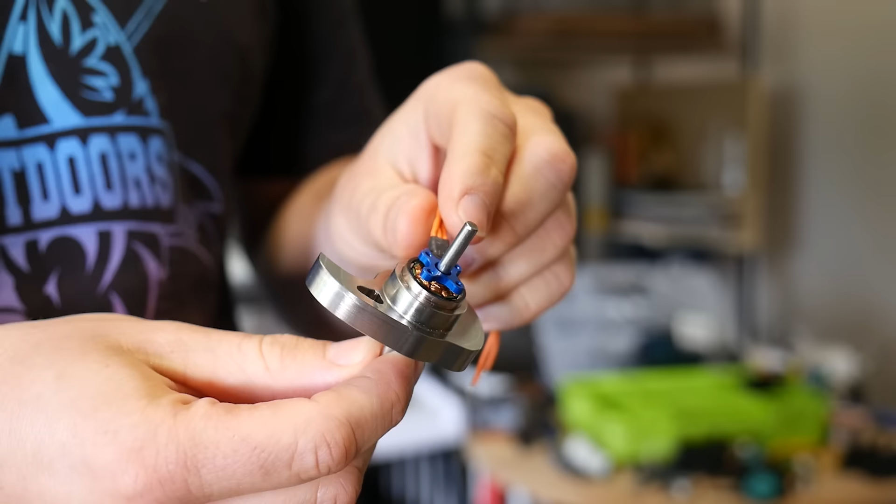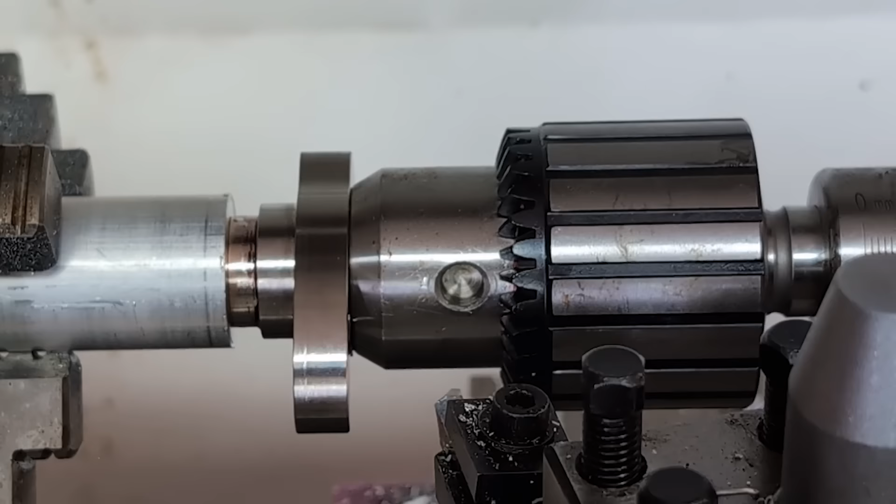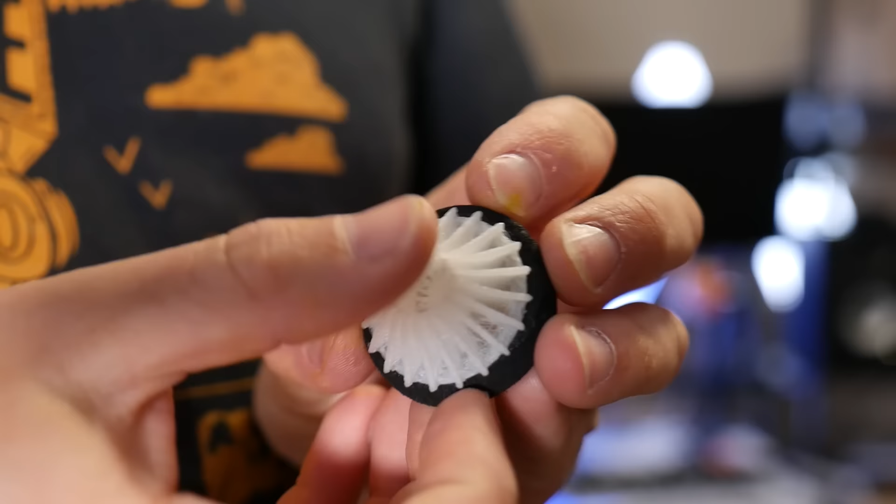This is a combat robot weapon blade with integrated motor made from solid titanium, and it's designed to never stop spinning. In the previous video, I went over the design and manufacturing involved to bring it to life, but now it needs to go into a combat robot to put that theory to the test. So in this video, I'm going to show you how I used advanced 3D printing materials and unusual design choices to make this. My name is Angus, this is Maker's Muse, and this is Dead Cat Bounce. Let's get started.

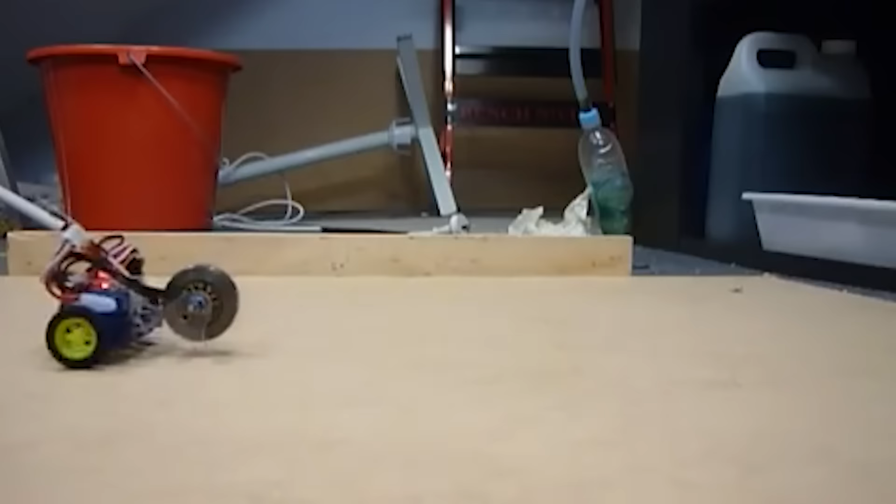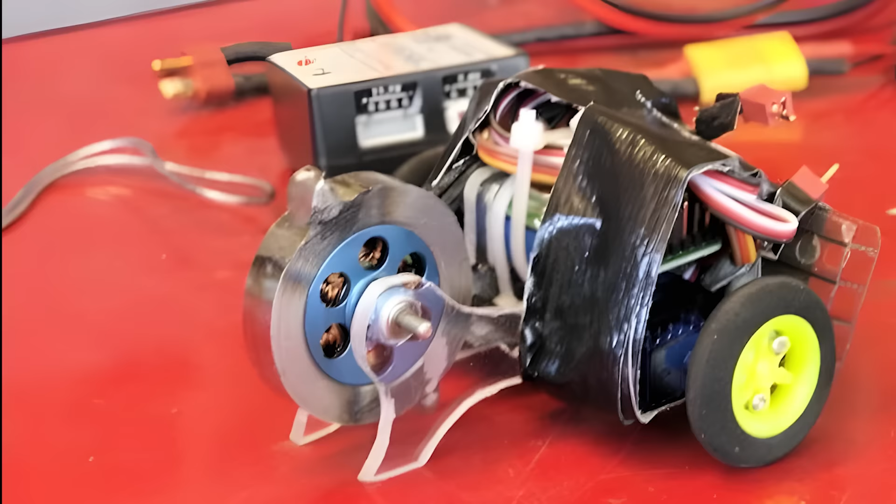In the previous video, I talked about Nyant. This little vertical spinner was a ton of fun to compete with all those years ago, and it dished out its fair share of damage, but it had literally no armor, and with how competitive the Antweight class has become here in Australia, that's just not going to cut it anymore.

This hub motor is the start of a whole new vertical spinner design, which I hope is as durable as it is destructive. But now comes the hard part. I need to design the rest of the robot around it to be just as tough, and we need to fit it all within the tiny 150 gram weight limit.

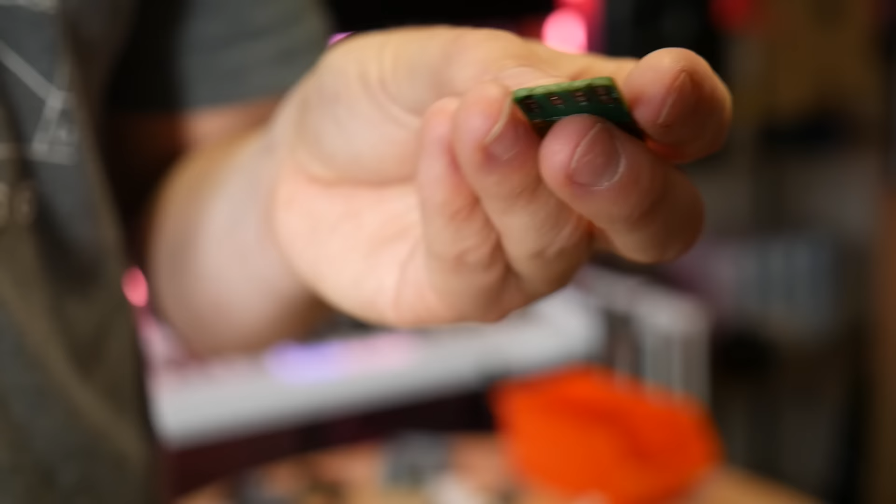For drives, I'm going to go with these N10 gear motors from Wranglebox. These motors are a premium option for Antweights, but they actually weigh less than the previous motors I used while having more power, and they're more compact, plus they have a steel faceplate, which should be much more resilient to impact. To control them as well as the weapon, once again I'm using a Malenki Nano. This combines the roles of several motor controllers as well as the receiver all in one compact board, which is super handy at this scale because it cuts down on a heap of wiring.

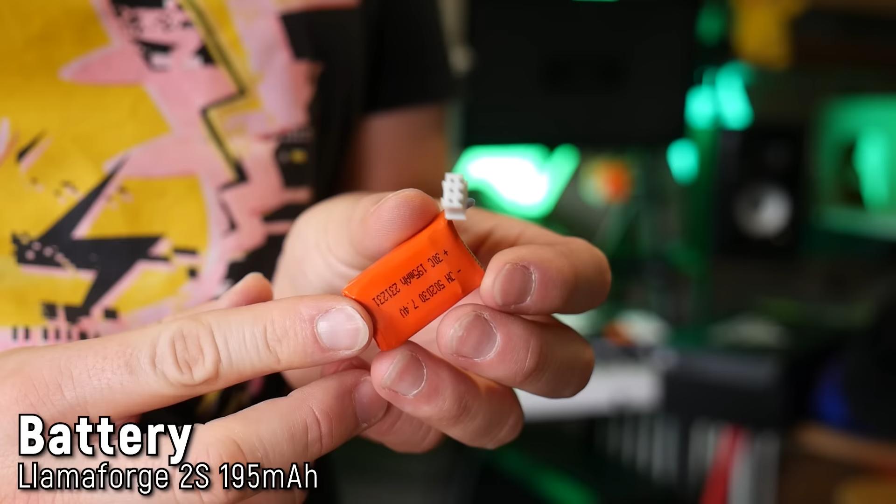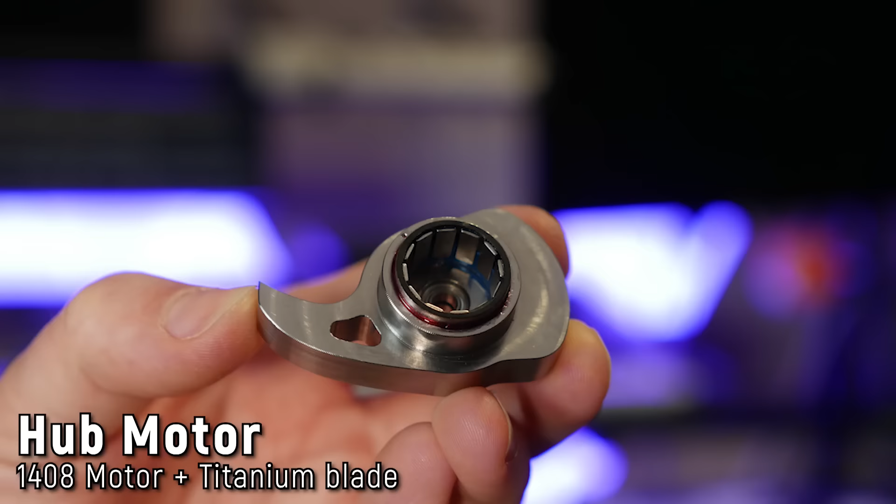The battery is this 2-cell 195 mAh pack from Llamaforge here in Australia, and the weapon system, well, you've seen it already. This massive hub motor is made out of a 1408 size brushless outrunner that's been carved up and inserted into a solid titanium blade, and it's controlled with a cheap 40 amp brushless speed controller running AM32 firmware. I actually don't know what these speed controllers are called, but they seem to work great, and we've just started calling them the No Fish ESCs because of this little icon on them.

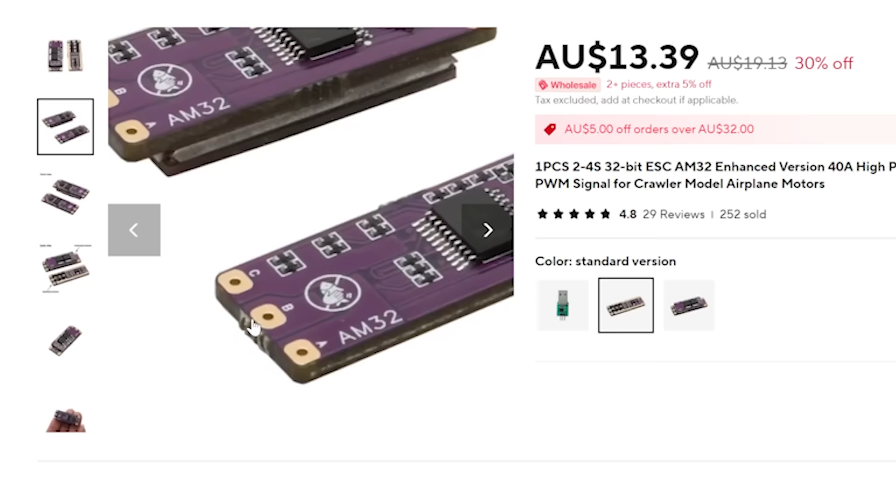So it's time to fire up CAD and get to work. No, just kidding, you know the rules, it's pen and paper time. Always sketch out your ideas before launching into CAD because you can box yourself in to your knowledge of the software instead of exploring really creative ideas with pen and paper. And the best way to design Antweight robots by far, in my opinion, is to just lay out the parts on some grid paper and smash out some concepts.

We've already got this big vertical chunky disc, so I just traced it and then figured out how to fit everything around it in a nice compact package.

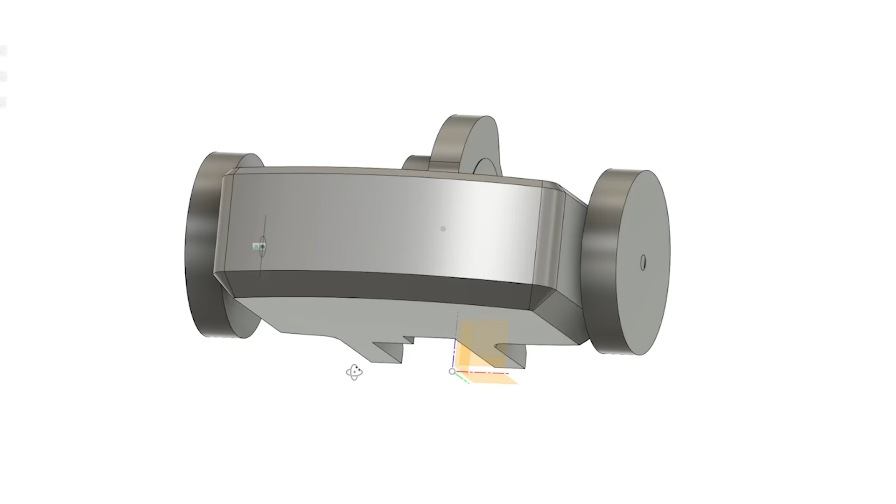With a notebook sketch serving as my template, we can now finally fire up CAD, and this was my first pass. The huge blade in such a tiny frame looks pretty ridiculous, and I don't doubt it'll dish out the damage, but those wheels indeed do look pretty vulnerable. It wouldn't take much for another spinner to clip them at the front or rear and just tear them right off. The rear cavity does seem to have plenty of space for all the electronics, but again, it's also very vulnerable if my opponent gets a lucky hit to the back.

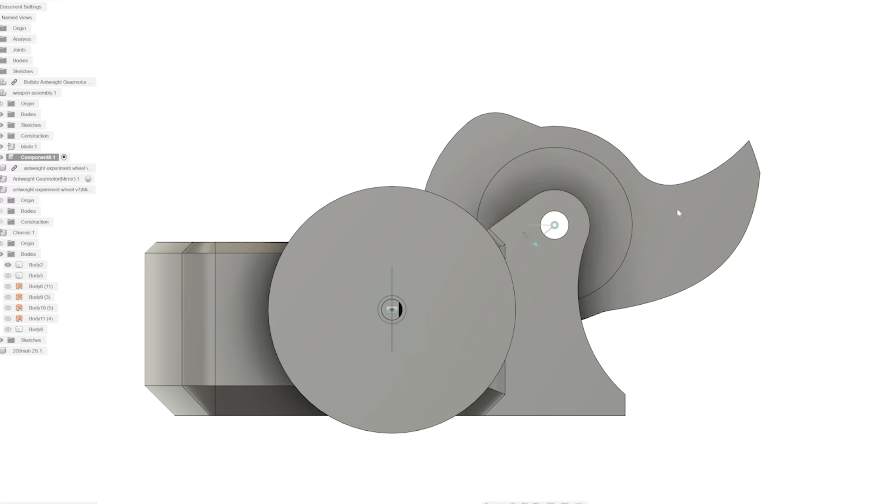Also, the blade actually extends down past the frame. This is intentional because the wheels will give the robot some clearance, but I'll definitely need some sort of skid to stop it from smashing on the floor as it drives around. Thankfully though, because it's so tiny, the frame weighs less than 20 grams so far, so there's definitely weight to spare for a bit of offensive design and a lot of defensive design.

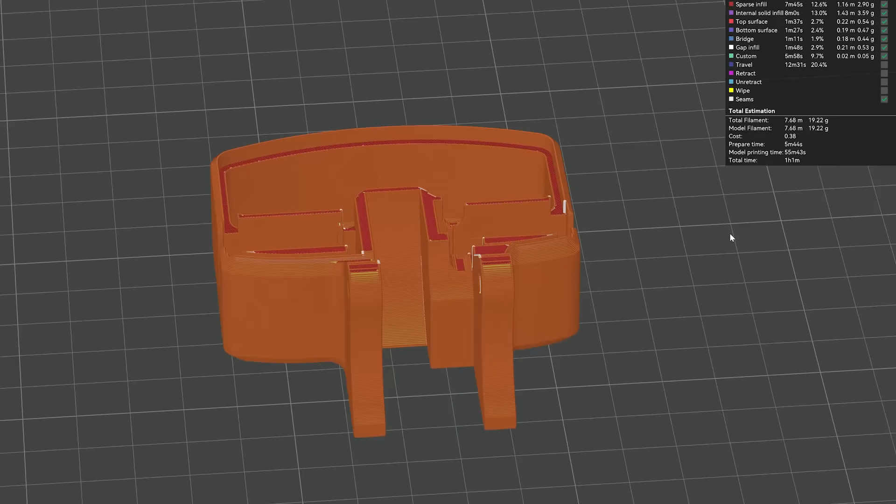And I've got this absolutely wacky idea I've wanted to try for some time. A long time ago, I had a beetleweight robot called Fugu, and it was covered with these metal spikes made from bicycle spokes. The idea was that these spikes would soak spinner hits before they even got to the chassis, absorbing the energy and deflecting, or at worst, ripping them off like ablative armor.

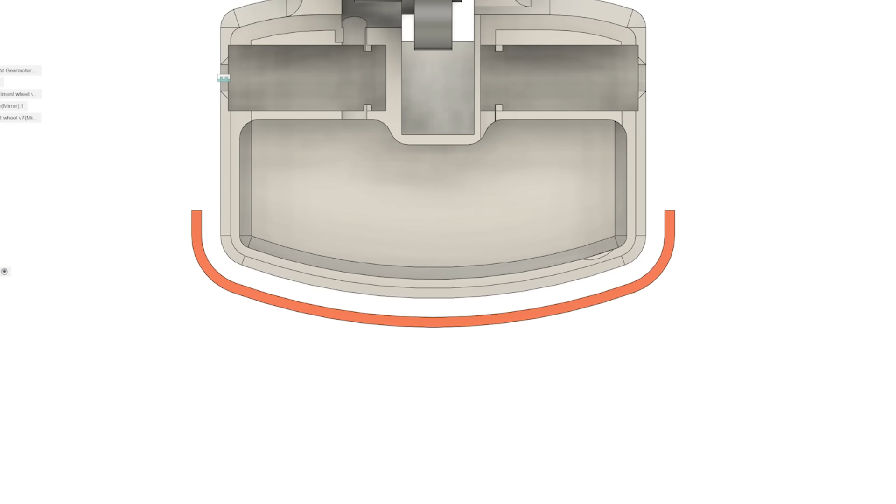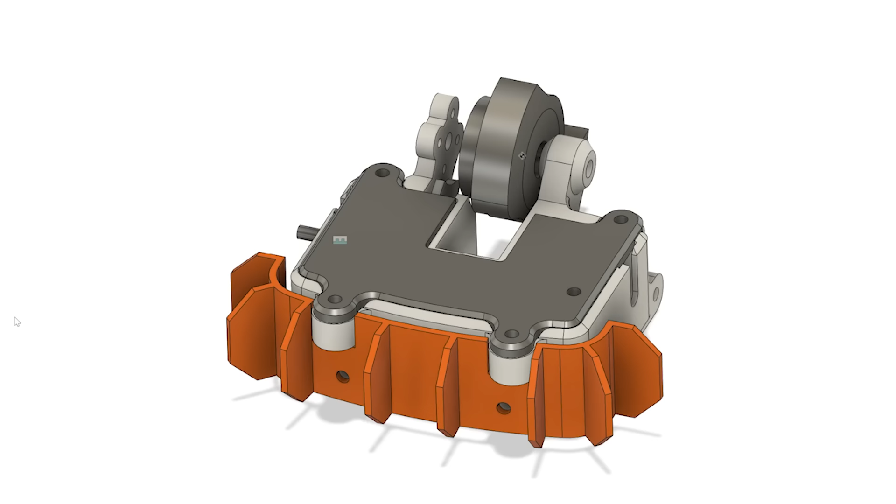I want to apply that armor philosophy again here, but instead of using metal spikes, I want to try 3D printing flaps made from squishy, durable TPU. TPU has already proven itself as a wonder material for combat robots at this scale, and let me tell you, it can really take a beating, so I reckon something like this could work as lightweight armor. My hypothesis is that horizontal spinners will catch on the fins, and vertical spinners should be kept far away enough from the bot by them so they can't land massive hits on the other side of the chassis. And if they do get too damaged or ripped off, who cares? That's what they're there for. But what kind of TPU is best for this application, and what material should I use for the chassis itself?

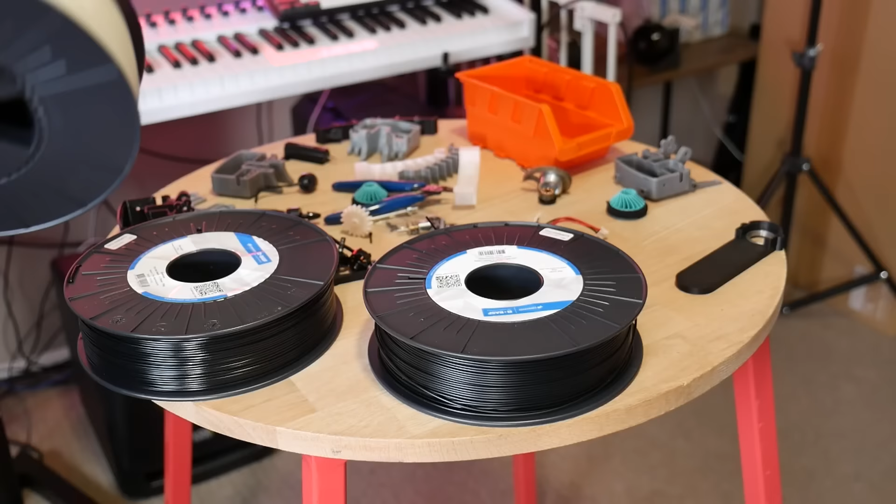Starting with the TPU. From this super soft and elastic 85A shore hardness TPU to a more standard 95A TPU, which still has plenty of flex but a little less squish, all the way to this stuff, which I bet most of you didn't even know existed. This is TPU with a shore hardness of 64D, the hardest TPU you're likely to come across. It's still flexible, but quite springy, and I suspect it'll create incredibly tough 3D prints.

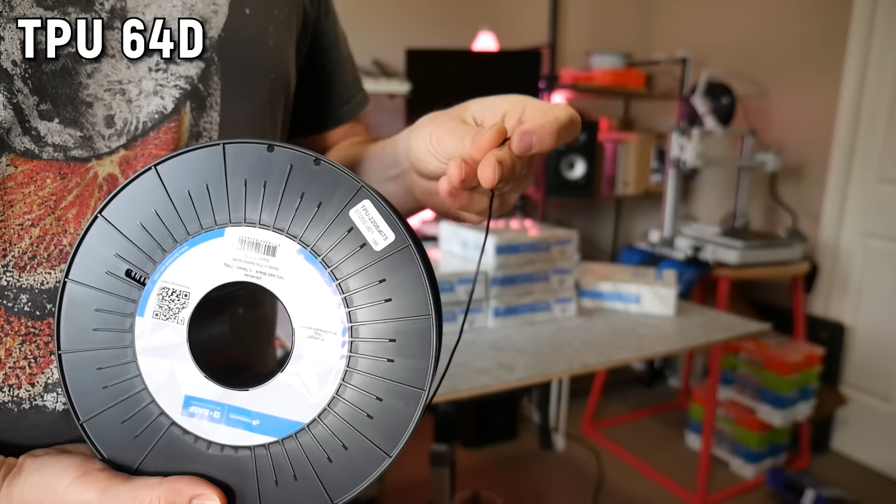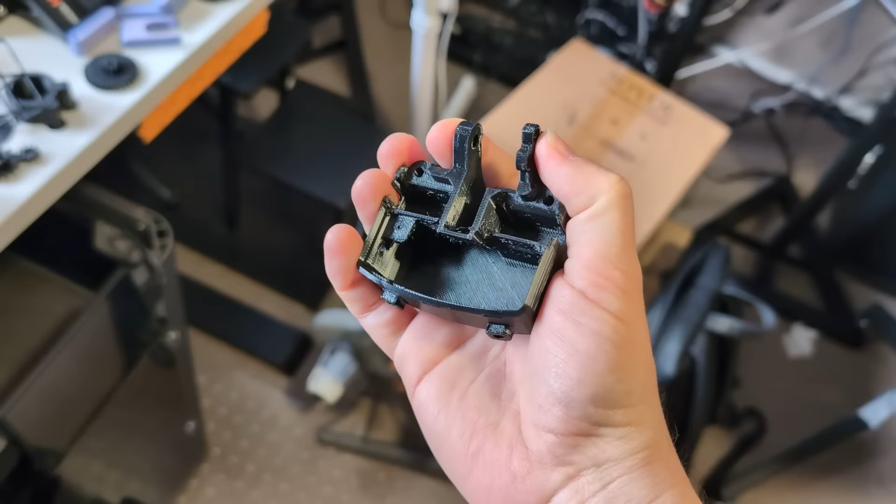From my experience, the softer a TPU is, the more resilient it is to impacts in the arena, but that comes at a cost of rigidity. For the weapon uprights of Dead Cat Bounce, a solid impact will force the weapon assembly down, and these uprights need to transfer that force through to the floor without deflecting or absorbing too much energy, which could suck all the power out of the hits.

Or worst case, bend the blade into the chassis, annihilating itself. On the other hand, the armor fins are purely there to deal with impacts, and they can deflect as much as they need to. Finally, there are the wheels, and I have this absolutely wacky idea for them.

Because this robot's wheels are fully exposed, one good hit on a standard solid wheel would easily tear it off and probably bend and break the shaft on the expensive gear motors in the process. But if the wheels could absorb the impact or ablate away, like the rear armor, well, you know where I'm going with this. Enter the fin wheel.

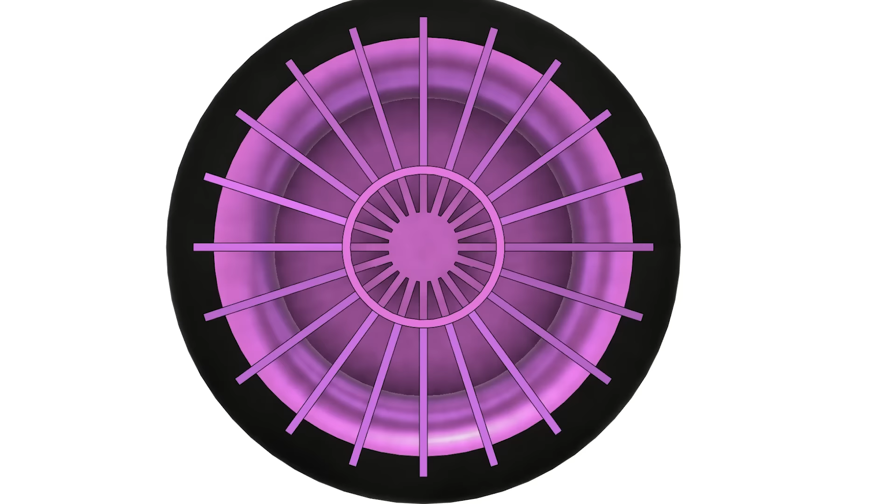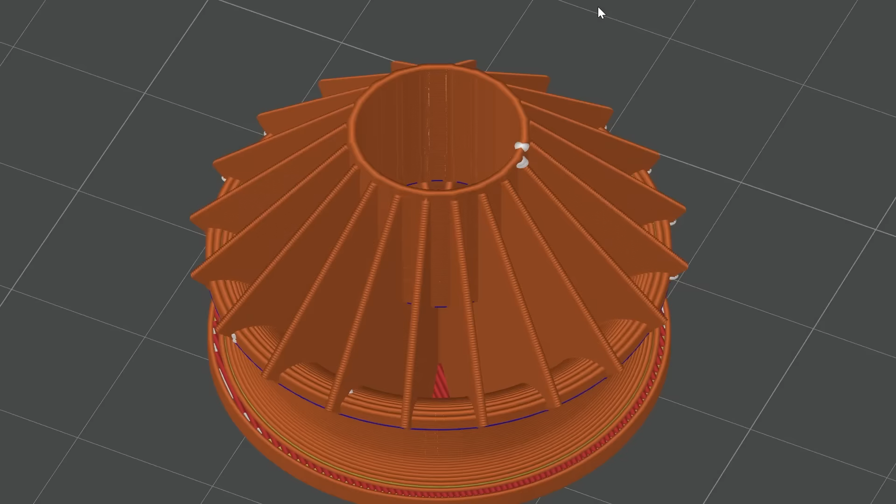Okay, I know, this wheel looks like something you'd find on a moon rover and not a combat robot, but it was very intentionally designed to absorb and deflect direct impacts from weapons that would tear up a standard wheel. It's also been designed to actually be 3D printable out of very soft TPU. The wheel portion holds a foam tire, which is then protected by these ribs, which fan out radially from the central hub. When you print super thin details like this from TPU, it tends to catch on the previous layers and push it around, which gives you a horrible looking print.

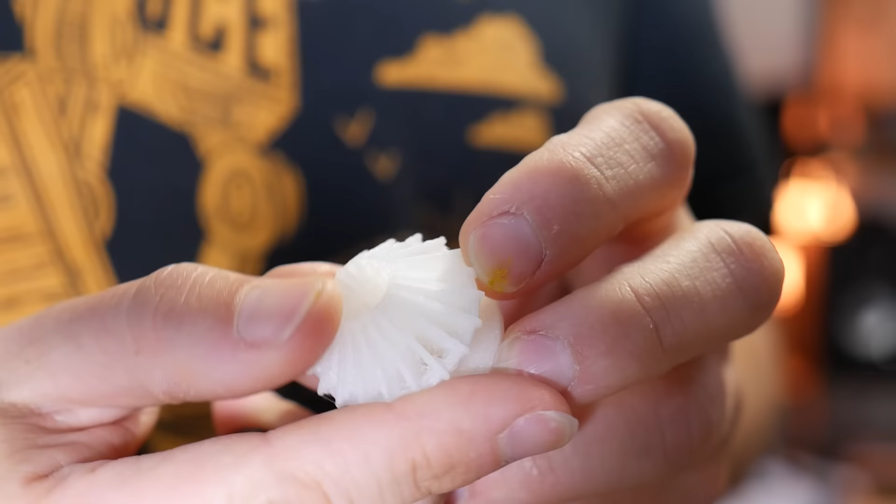So I made all the fins joined in the center, but only for the printing process. Once a print was complete, I went in and cut each fin free, and this was the result. I went with Forward AM's 85A TPU for the wheels, and it's very soft with a lot of give.

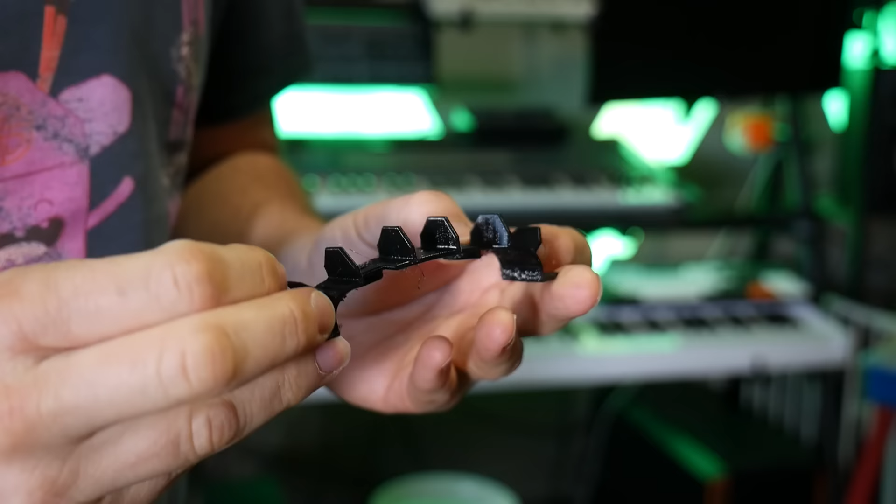Pretty cool. For the rear armor though, we want something a bit different. The 85A stuff is probably way too soft, so I printed one out of 95A and another out of the 64D TPU. And honestly, I think I like the 64D one more. The fins feel springy with a nice toughness. In fact, the properties remind me a bit of polypropylene, but without any of the annoying hassle that printing with polypropylene actually needs. That just leaves the chassis and the forks.

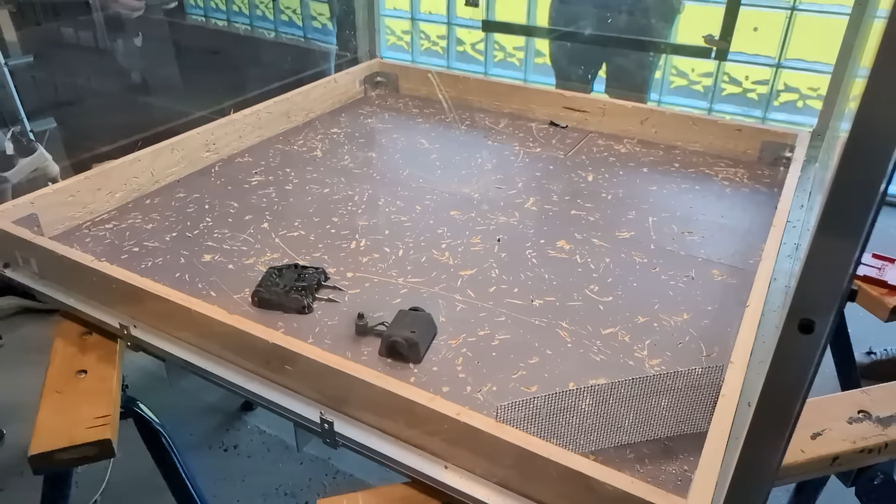A very large part of combat robot competitiveness is the ground game. You need to get under your opponent if you want to hit them or control the fight. And the forks need to take an absolute beating. So I figured that they're the perfect robot element to put this range of engineering filaments to the test with my very own homebrew impact test jig.

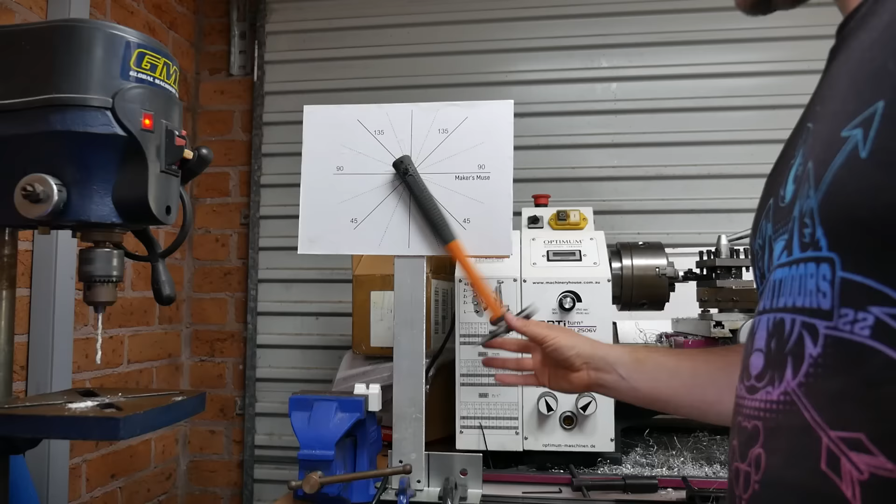This jig lets me swing a hammer into the forks with high repeatability and accuracy. It's loosely based off the Charpy impact test, but instead of trying to create a standardized test, I'm just really interested to see how my robot parts perform in a simulated robot combat impact.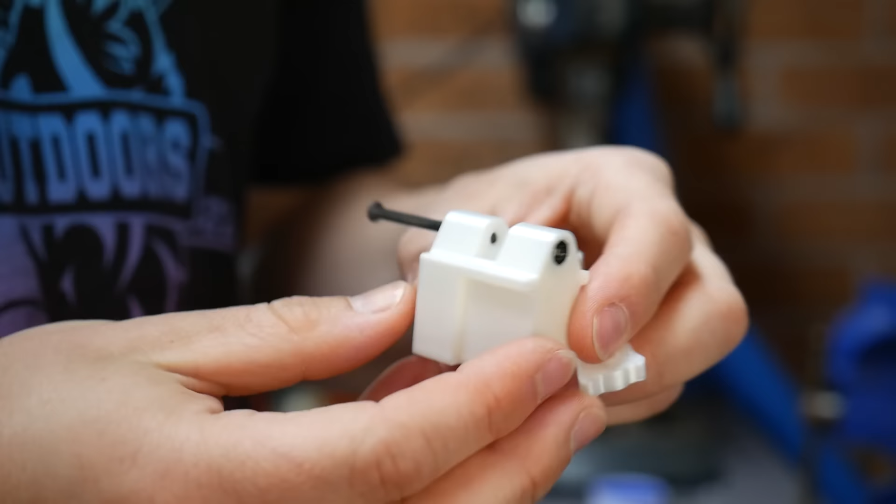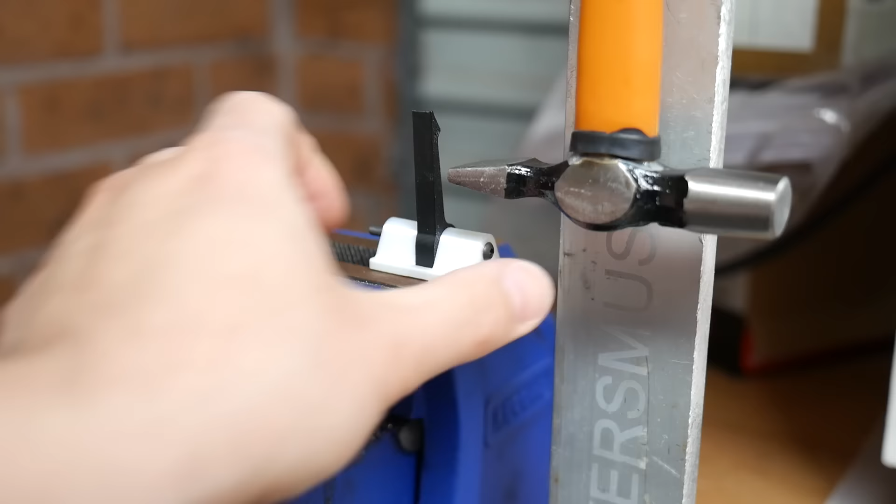To constrain the forks, I 3D printed this chunky support block from Pro 1 PLA, which is a crazy strong PLA blend that got my attention years ago with its performance when I was testing the static load of 3D printed gears. And with anything destructive, safety goggles are strictly required. We'll kick things off with Ultrafuse Pro 1 PLA. Despite its strength, this filament is just as easy to print with as regular PLA and has a really clean, almost pearlescent surface finish, and it has really good mechanical properties, so let's see how it goes.

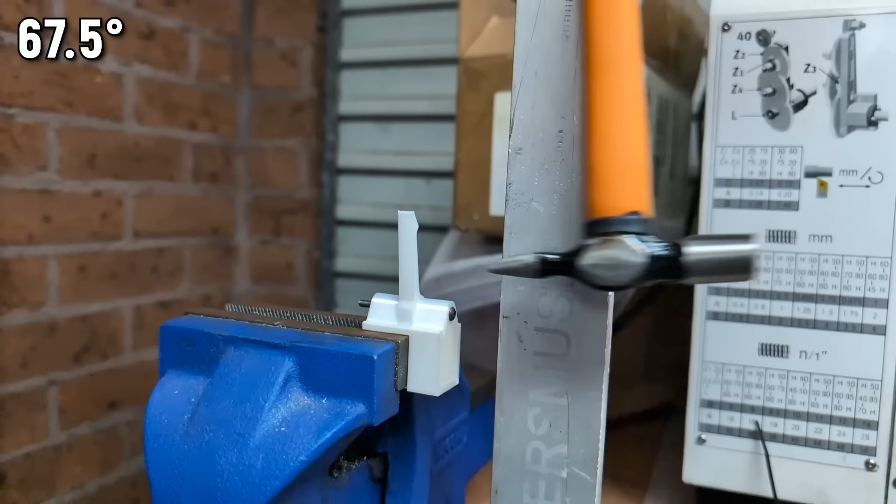With the hammer at 22.5 degrees all the way up to 67.5 degrees, this filament held its ground, and you can see almost all of the energy going into the sample is being conserved and reflected back as the hammer bounces back almost as far as it swung. In fact, the fork barely deflects at all, even all the way up to its limit, but boy, was that limit reached. The impact shears the fork clean off, violently sending it flying across the room. So it's clearly incredibly stiff, but when it fails, oh boy will you know about it.

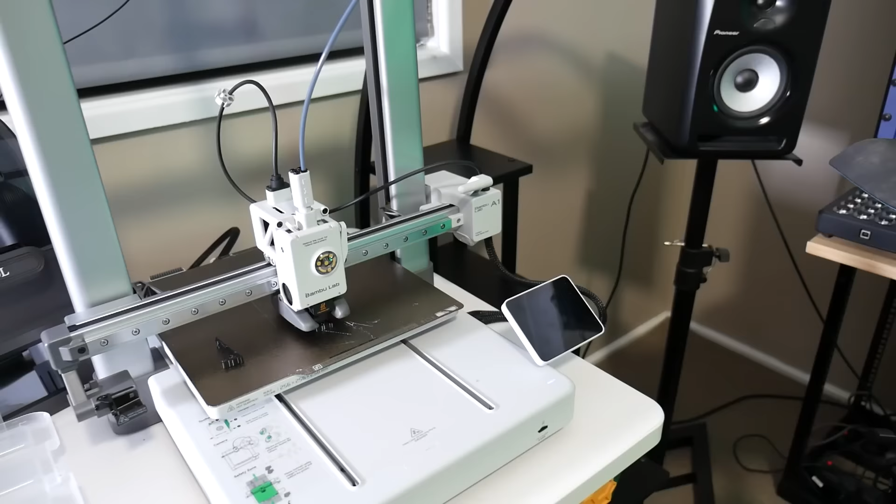Now onto the other end of the spectrum, we have UltraFuse TPU 64D, which is a stiff TPU, but these are still flexible forks. I'm not sure how well these would hold their shape in an impact, so let's find out.

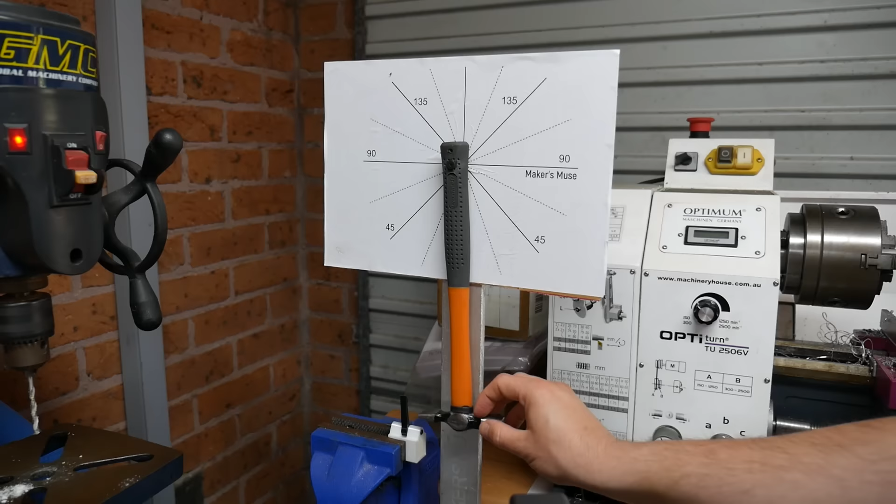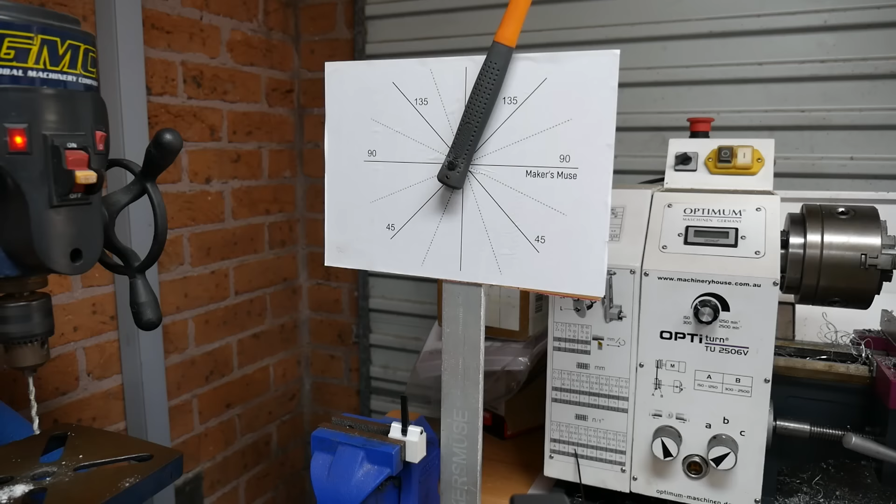I find it so interesting just how different these results are from the Pro 1 PLA. These forks absorb a ton of energy from the hammer hitting them, deflecting in the process. It's not a lot to begin with, but once the hammer is at the near top of its swing, the forks bend so much that the hammer just passes by and actually gets jammed in this awkward position with the forks bent out of shape. Forks like this, I think, would be great against nasty spinners, but when it comes to the ground game, I suspect they won't be as effective as a more rigid material, and they could even get bent or jammed up under the frame if the impact is large enough.

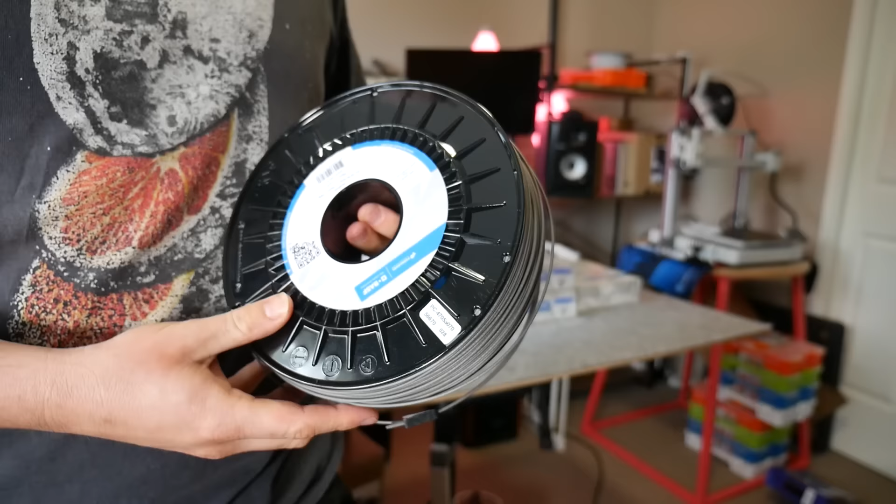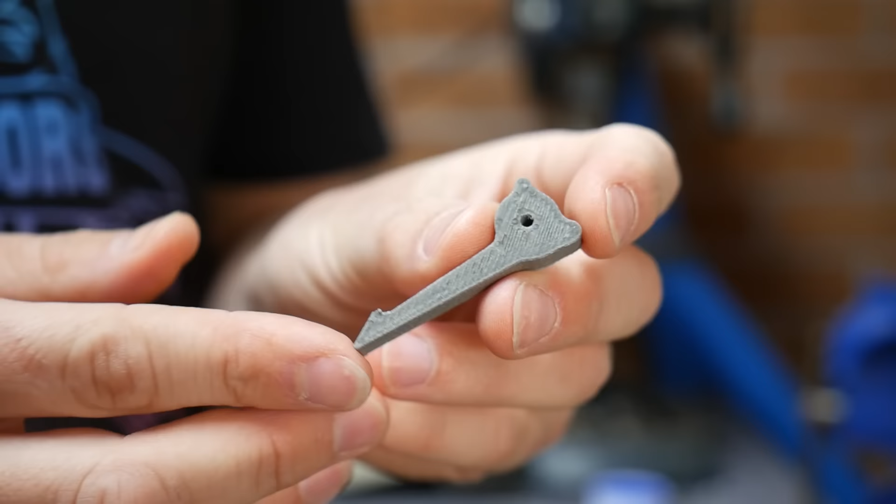Next up is this crazy stuff, UltraFuse PCGF30 from Forward AM's reinforced filament line. This is polycarbonate with a 30% glass fiber fill and has a print temperature range of 280 degrees up to 330 degrees C. As you can imagine, it's got quite good temperature resistance and it's really, really rigid. So I'm actually really curious to see how it performs.

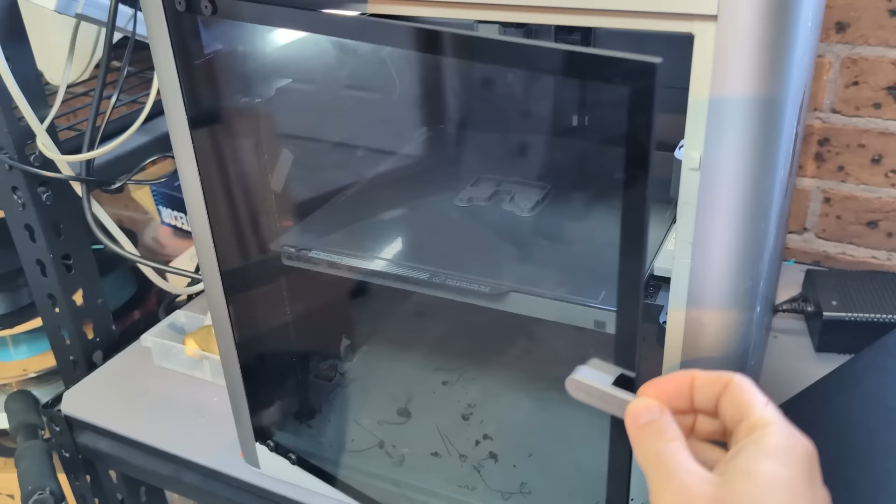Like the Pro 1 PLA, the PCGF30 seems to be really good at reflecting back the energy from the impacts, but unfortunately it still failed with a hammer at 112.5 degrees, which sheared the sample off at its weakest point. Because it's capable of withstanding such high temperatures, I'll definitely be revisiting this material for future parts that need to be rigid and withstand heat, but for my combat robot forks that will get smacked hard by metal weapons, I don't think it's the right choice.

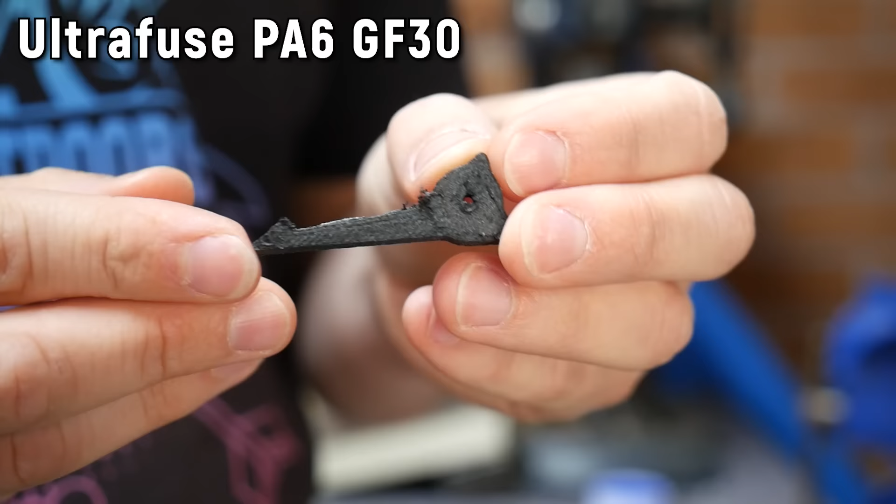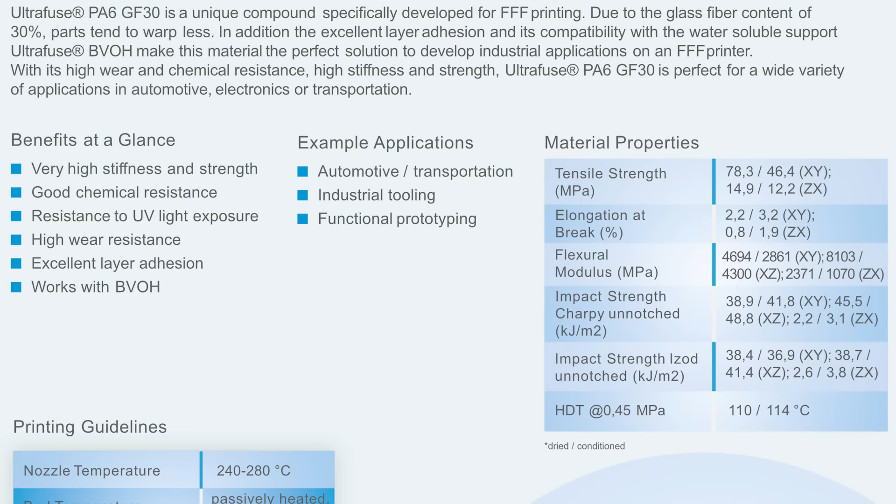Last but certainly not least, we have UltraFuse PA6GF30. This is a glass-filled nylon 6 and it means the business. The filament has this super rough texture and you do need a 0.6mm or larger nozzle to print it or it will clog up. But according to Forward AM's datasheet, it promises very high stiffness and strength with excellent layer adhesion. So let's see if it lives up to expectations.

Well, yep, there you have it. I couldn't break them. I put the hammer all the way out to 180 degrees and it still just bounced off like nothing. And it's really important to mention here that I was using the same default print settings for all of these samples. They are not printed more solid or denser or at a different layer height, exactly the same as the other materials. This stuff is just really, really tough.

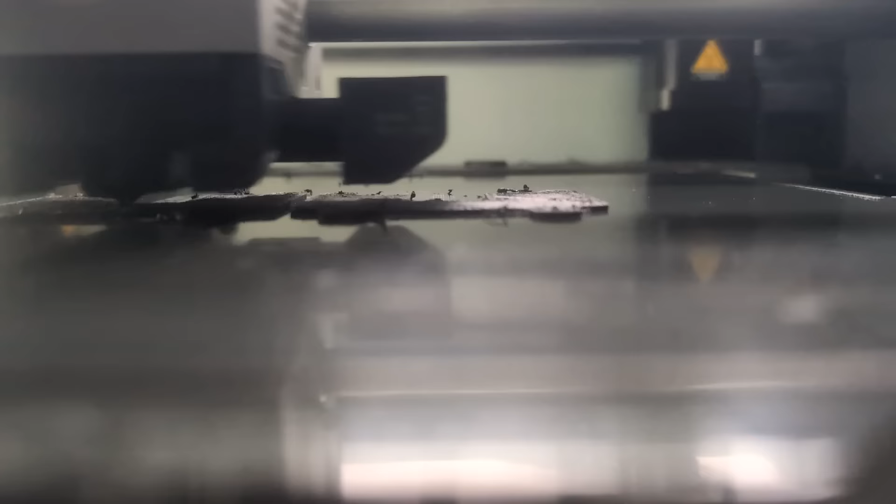Though I do have a word of warning, this stuff is very abrasive. It needs to be fully dried for printing, and I used a bed adhesion spray for extra security to prevent the prints from failing. And after all of that experimentation, I've chosen my materials for this build.

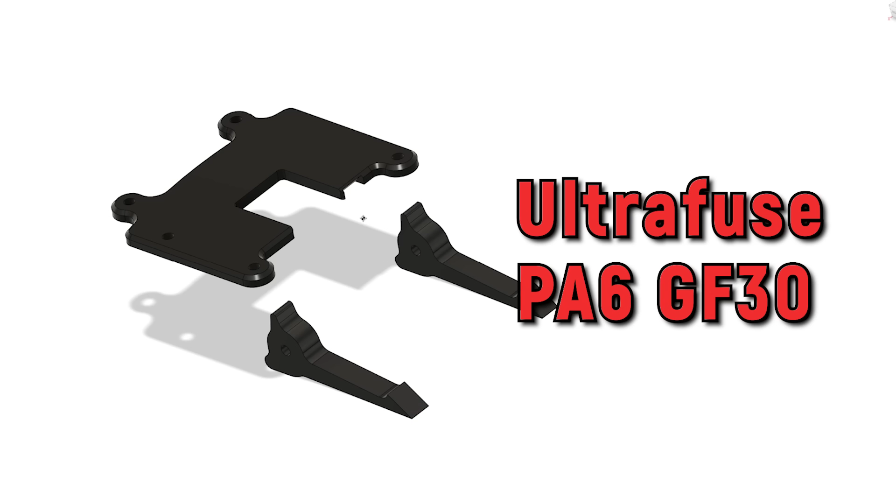The frame of the robot as well as the rear armor will be printed from the 64D TPU, the wheels will be printed from the very soft 85A TPU, and the forks and top plate are printed from PA6GF30. This is going to be one tough bot.

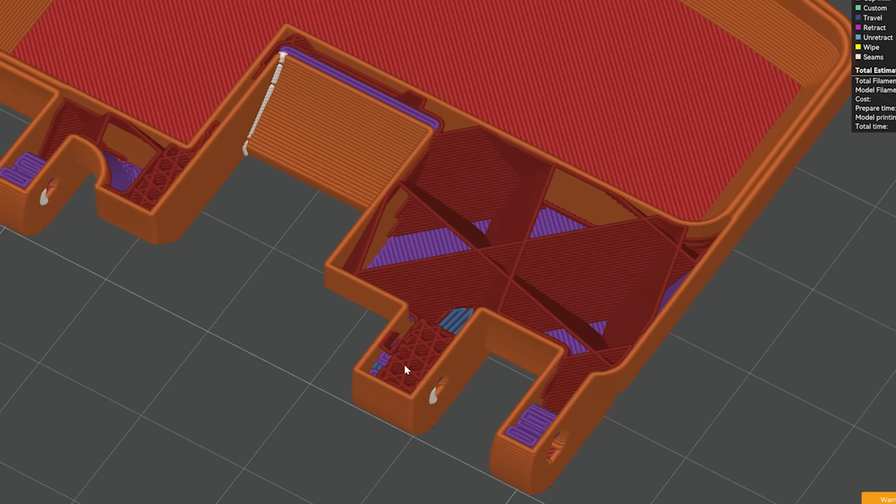To make the chassis as lightweight as possible but strong in areas that it needed it, I designed in modifier meshes into the file itself, and then within Bambu Studio, I assigned these modifier meshes a denser infill than the rest of the print. This was especially important for the uprights of the vertical weapon, because I didn't want that area to deform too much on large impacts. But by using modifier meshes, it meant I could make the rest of the print much lighter weight, where it didn't really need that strength.

You can use support material with TPU, but I prefer not to, so I designed in these bridging features in the areas that would hold the Malenki Nano, and I especially like how this detail turned out with an overhang that eventually bridges to hold the switch in place.

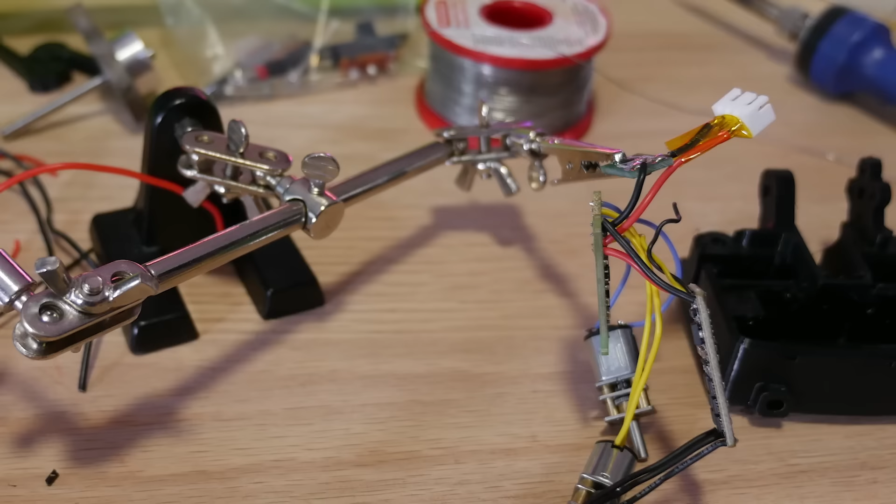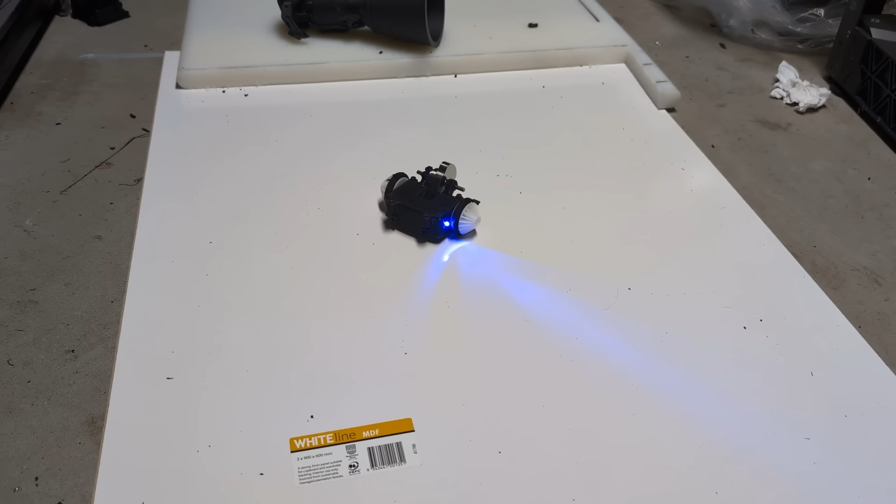Now all that's left is the tedious job of wiring such a tiny machine. My advice, get yourself a soldering iron with a really fine tip and practice a lot before attempting to wire up something like this, because some of the components are incredibly delicate and very easy to damage if you don't solder them correctly. And also don't forget, wire fatigue is the number one killer of combat robots. It's all too easy when you're trying to shove complex parts into a tiny ant-weight frame to move the wires too much and snap them off. And I'll be honest, wiring this little robot took an entire evening to achieve. Take your time, get it right. And with that, I think it's time for a test.

This is my worst fear realized. A vertical spinner that cannot self-right is an instant death sentence, and I was so sure that my hub motor would have enough torque to turn itself over when upside down.

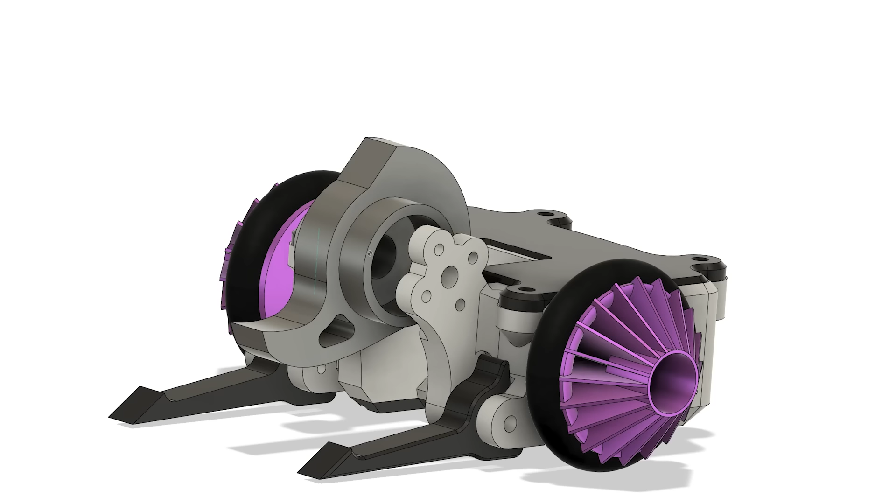I've seen a few builders give their verts little sticks out the top to give the blade more of a chance to spin up, so I quickly kludged this into the design, and no. Because I've made the weapon tooth so aggressive, the motor would need heaps of power to simply turn over, let alone start spooling up.

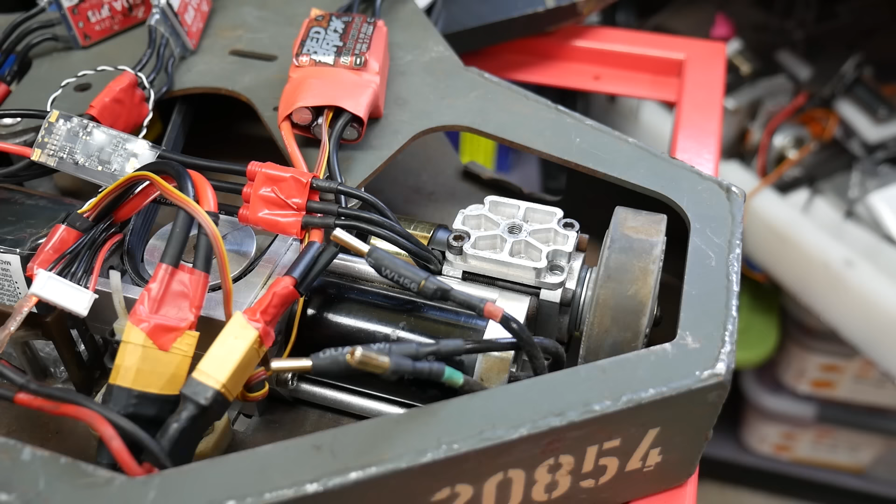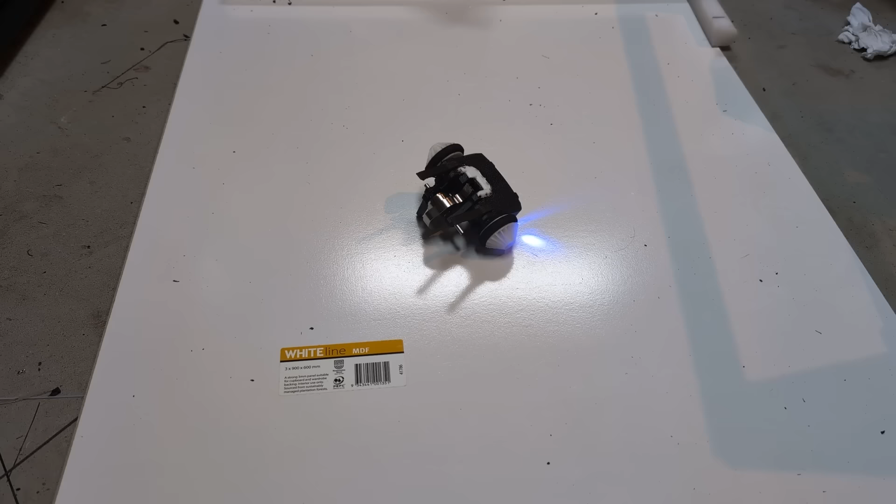AM32 firmware is super cool in the fact you can actually control sensorless brushless motors bi-directionally. Normally, I'd only consider using that for drive motors, but in this case, it might be just what I need to get this bot back on its wheels when it's flipped over. So, fingers crossed, let's give it a shot.

It works. It actually works. And it works really well, especially considering there's a little bit of brake in the motor still with the settings, so it actually lands back on its wheels really reliably.

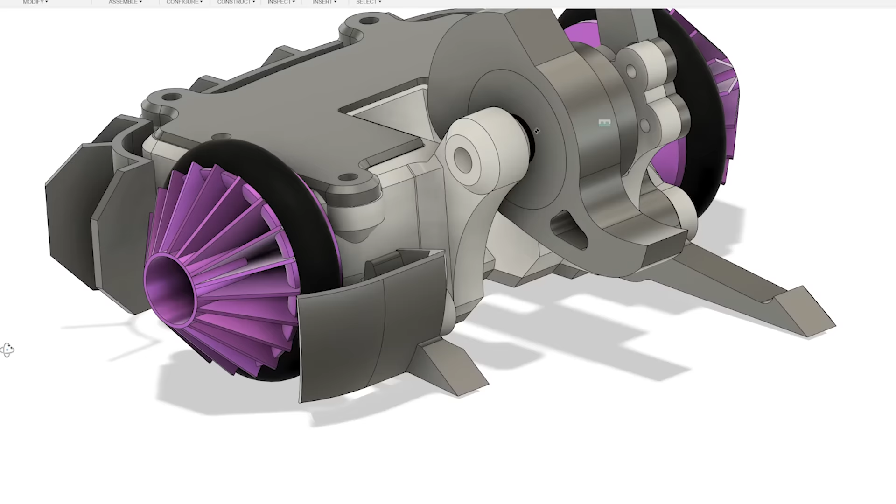I'm so relieved. And as a last minute thing, I designed these stubby forks with additional guards on them, printed out of the 64D TPU, because there's a few nasty horizontal spinners in the competition, and in that case, I think the wheels might need a little bit of assistance if they're going to stay intact.

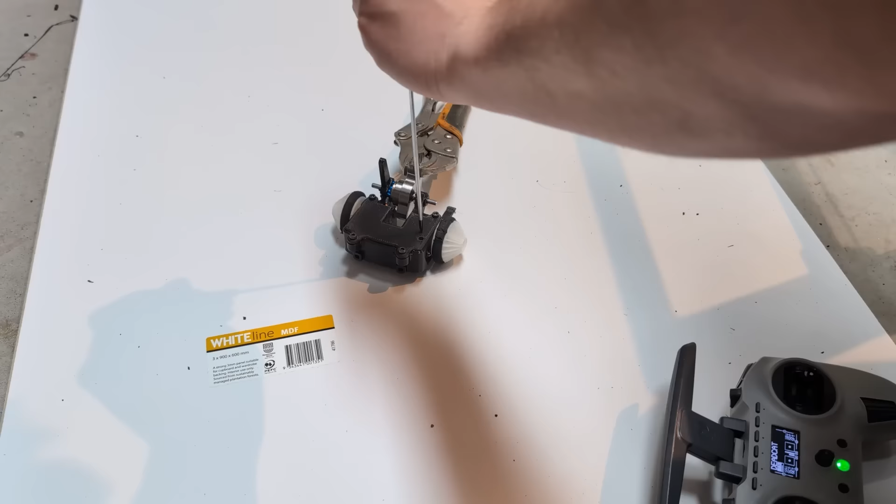And with that, the bot is almost done, but we still need a little bit of style. So I asked my in-house designer kindly to draw me up a logo for the bot, and I laser etched it right into the top plate through some paint. I give you Dead Cat Bounce.

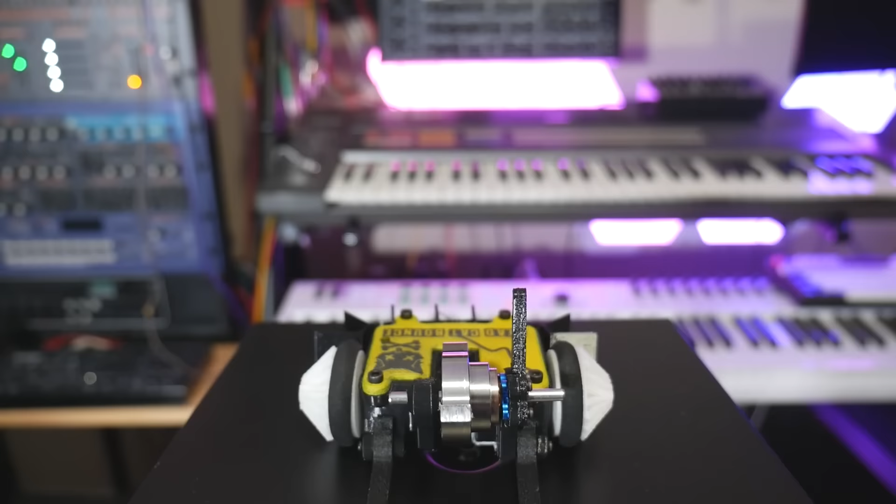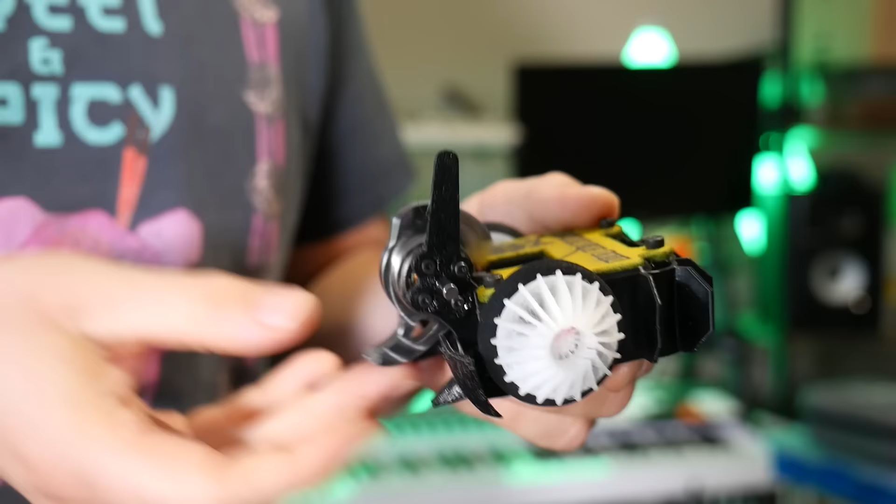Coming in at 147 grams, this thing is chunky, and that hub motor looks oh so mean. So I chucked it into the arena for a first real test.

First things to note, it sounds amazing. Second thing, it's fast. Honestly, a bit too fast. And third, the gyro is real.

Gyroscopic precession is this really weird phenomenon that occurs when a spinning object, like the vertical spinning disc on Dead Cat Bounce, is subject to a force that causes it to tilt or change its orientation. When the robot tries to turn, the spinning mass actually resists that turning force, causing the entire robot to lift up on one wheel in the direction of rotation.

That's why gyroscopes and spinning tops are so stable, and why vertical spinners are one of the hardest robots to drive. So with that in mind, why would you make a vertical spinning weapon if there's such a significant trade-off to control? Well, I think it's time for a destructive test.

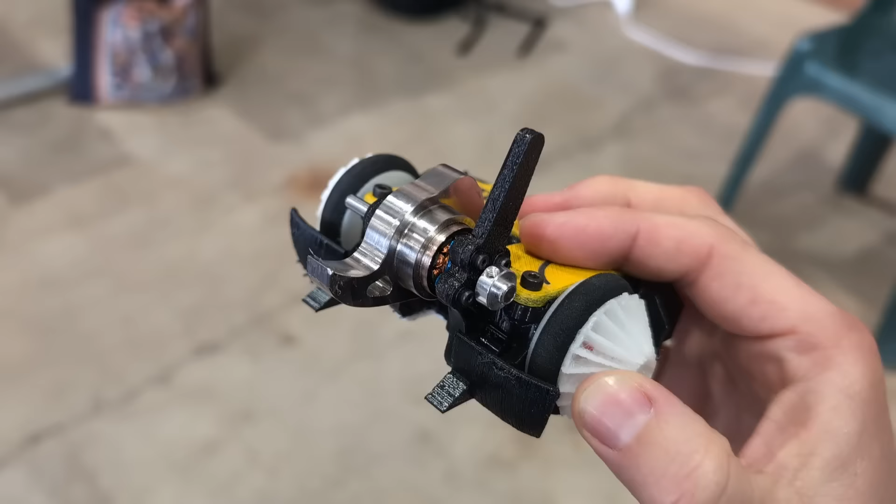Well, after a night of very little sleep, I headed off to our local ant-weight competition to see how Dead Cat Bounce would perform, and this was the result. Enjoy.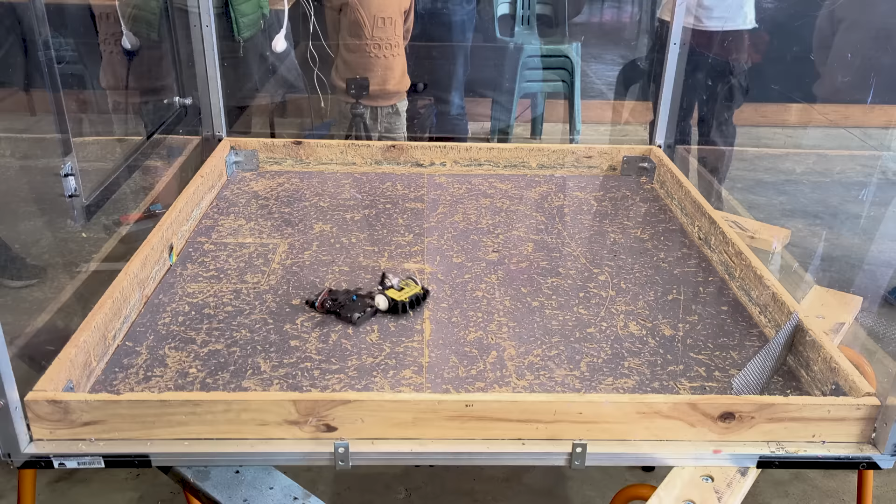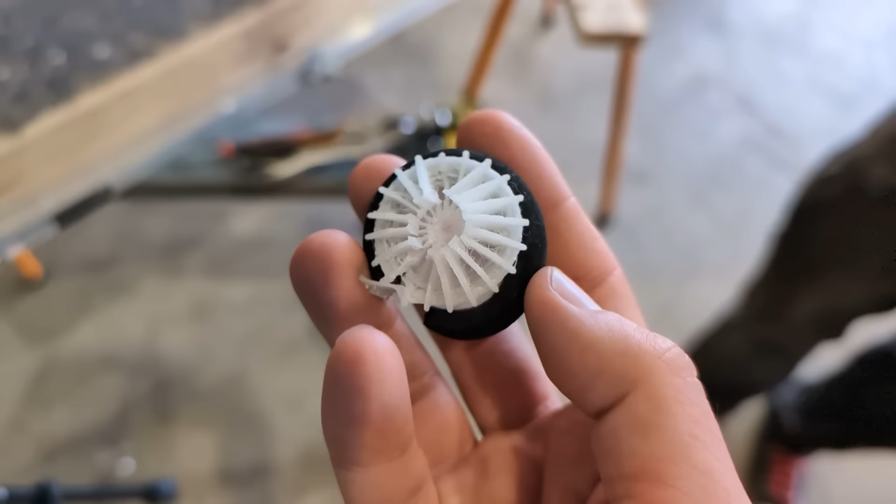Those gear motors are way too fast, and the fin wheels held up to some huge hits, but they did prove challenging to keep pressed onto the gear motor shafts. Because that TPU is so soft, they tended to pull off instead, which is not great because controlling a robot like this with only one wheel is, well...

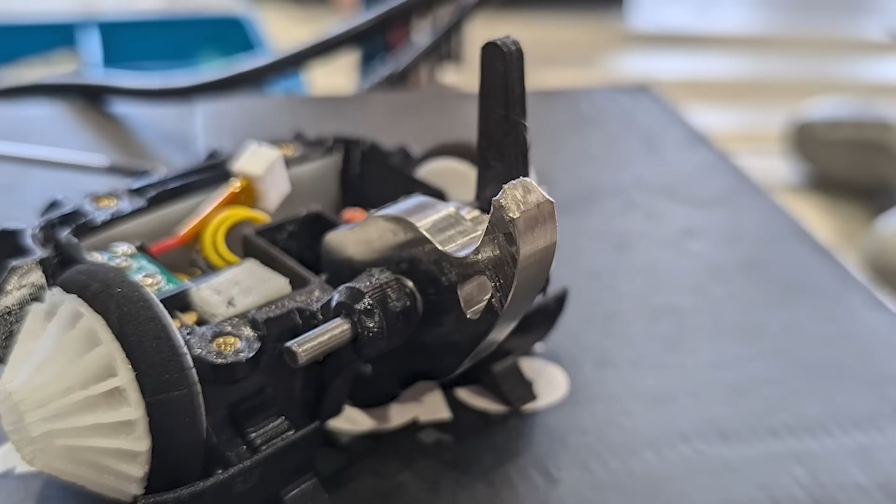And the bot's essentially undamaged. The weapon's a bit scuffed up, sure, but it works perfectly. And the frame, the armor, even the forks that took direct hits, they broke a little bit, they didn't rip completely off. That PA6 GF30 from 4am is no joke.

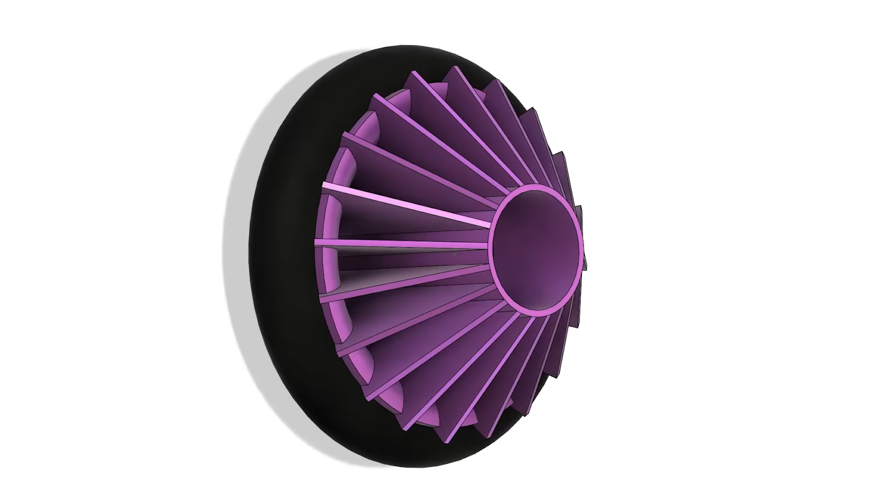I've already got some plans on how to refine the bot, but I'd love to hear your thoughts and comments in the description below, because there will definitely be a part 3 to this build.